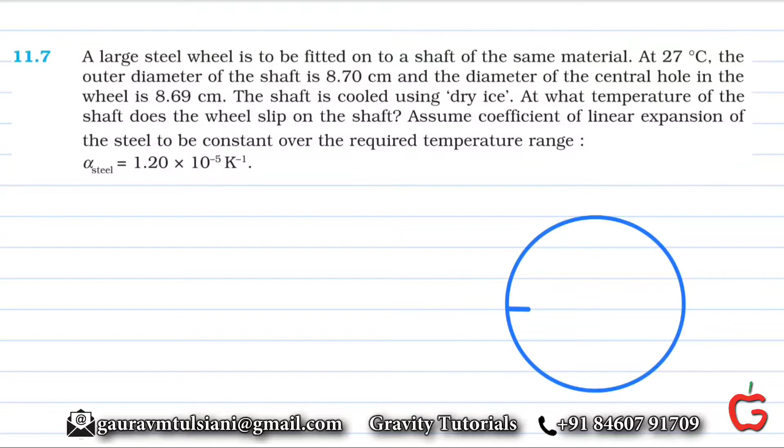At 27 degrees Celsius, the outer diameter of the shaft is 8.7 centimeter. So this is a shaft. The outer diameter, this, is 8.7 centimeter at 27 degrees Celsius.

And the diameter of the central hole in the wheel is 8.69 centimeter. So this is the shaft, the blue colored one. A wheel has to be fitted on it. The inner diameter of the wheel itself is smaller than the outer diameter of the shaft. So the inner diameter is slightly smaller.

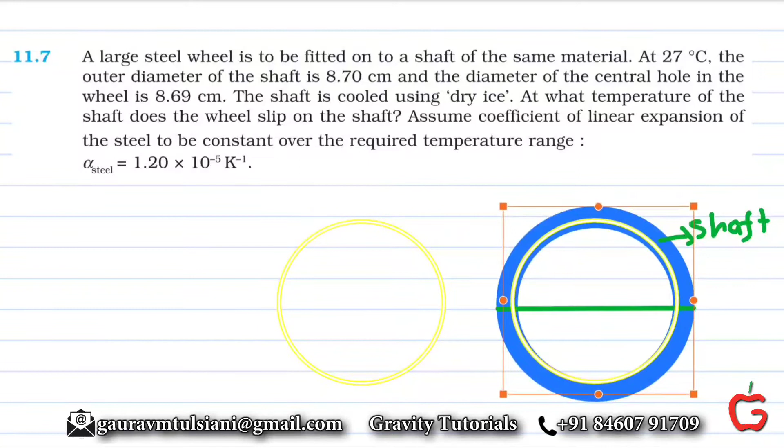Okay. So it's difficult to fit like this. So there are two methods to fit this wheel onto the shaft. So this has an inner diameter of 8.69 centimeter, whereas the outer diameter of the shaft itself is 8.7 centimeter. This is the wheel that has to be fit on the shaft.

So either we expand the wheel by heating it, or we contract the shaft by cooling it. So there are two methods to do this. Now they have used the cooling method. The shaft is cooled using dry ice. At what temperature of the shaft does the wheel slip on the shaft?

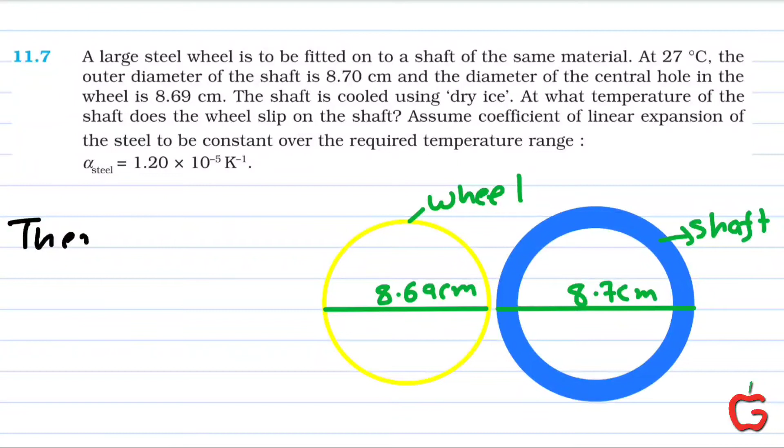So this wheel has to be slipped on, it has to be fitted on the shaft. So what should be the cold temperature of the shaft? We have to find that out, okay? The coefficient of thermal expansion is given here. So here thermal contraction of the shaft is going to happen. So at least the outer diameter should reduce from 8.7 to 8.69.

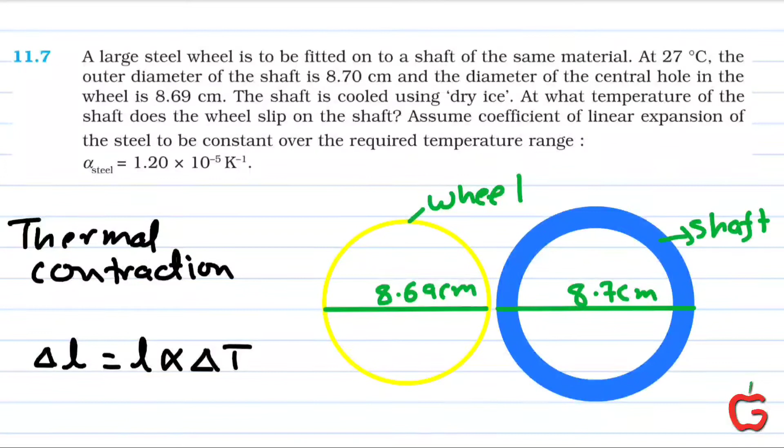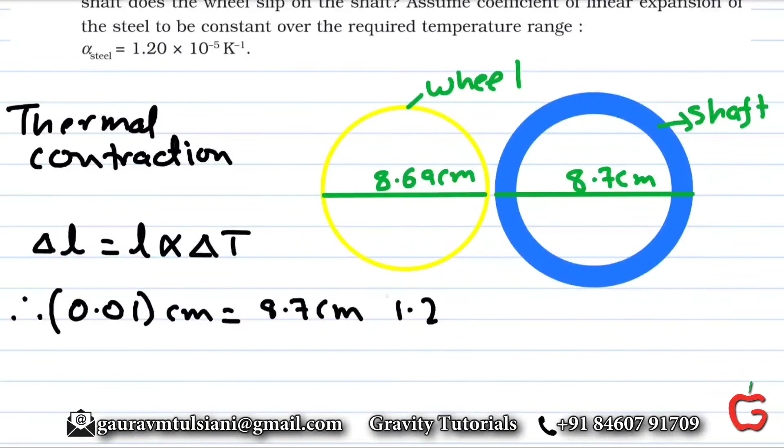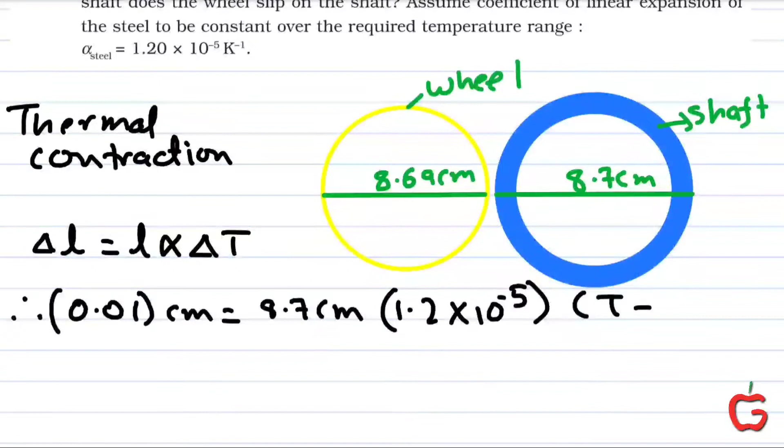So for that, the formula we use is delta L equals L alpha delta T. This is the formula for thermal expansion or thermal contraction. So the change in the diameter is 0.01 centimeters. The initial diameter is 8.7 centimeter. Alpha is given to be 1.2 times 10 to the power minus 5. And delta T, the change in temperature: the final temperature we have to find out, the initial temperature is given to be 27 degrees Celsius.

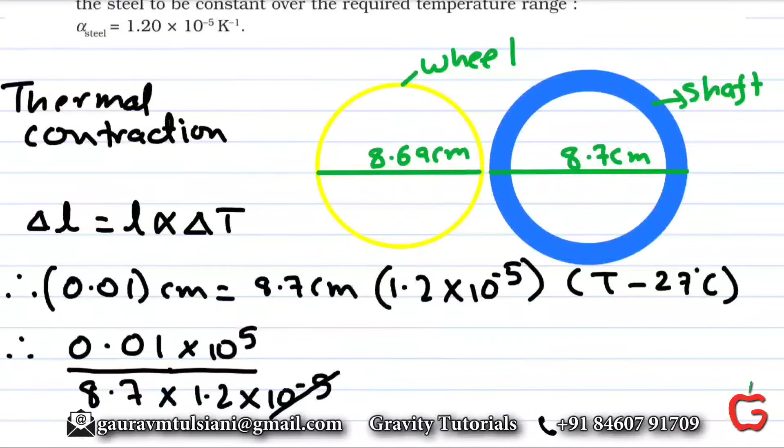Okay. So the unit centimeters get cancelled out. So we do 0.01 by 8.7 and 1.2. We have 10 raised to minus 5 in the denominator, so it goes in the numerator to become 10 raised to 5. This gives us T minus 27 degrees Celsius. So in calculating this, we get 95.785.

So this is T minus 27 degrees Celsius. Rather, this is negative. Since we are using thermal contraction, the change in length is negative. The change in diameter is negative. Okay. So temperature is 27 degrees Celsius minus 95.785 degrees Celsius.

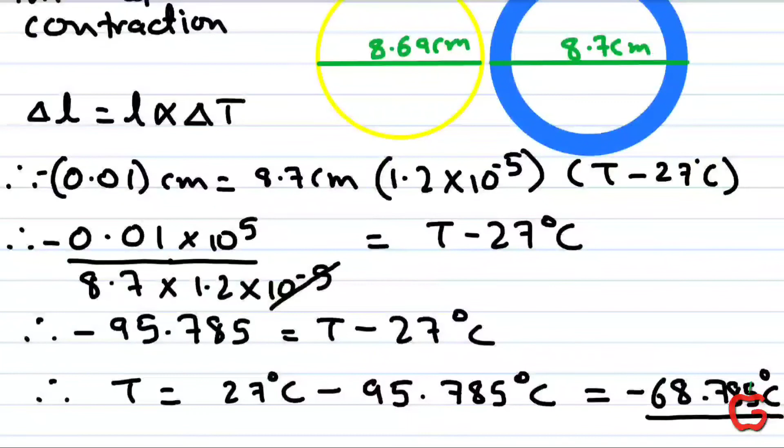So that gives us minus 68.785 degrees Celsius. So the shaft has to be cooled to this temperature in order to shrink it enough for the wheel to fit on it. So this is roughly minus 69 degrees Celsius. So that should be our answer. Okay.